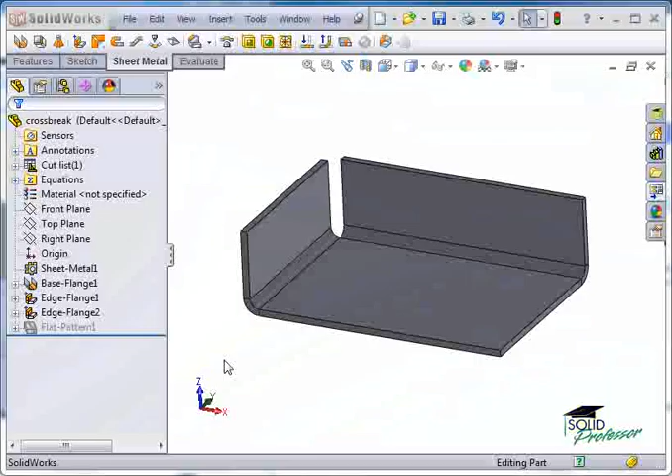If you've ever found yourself manually sketching lines to represent a cross break on a sheet metal part, SOLIDWORKS has a tool that will take care of that for you. Here, I have a simple sheet metal part, and I want to add a cross break to the bottom face to give it some more rigidity.

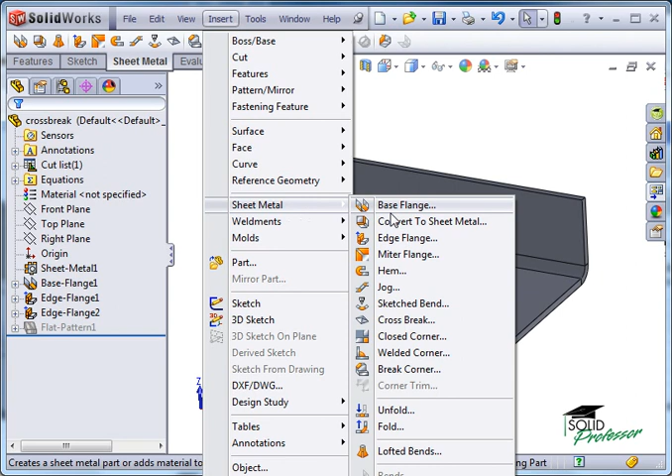I can activate the cross break tool from the sheet metal toolbar, or from the Insert Sheet Metal drop-down menu. The selection box asks me to select the face or faces I would like to add to the cross break. I'll select the bottom face.

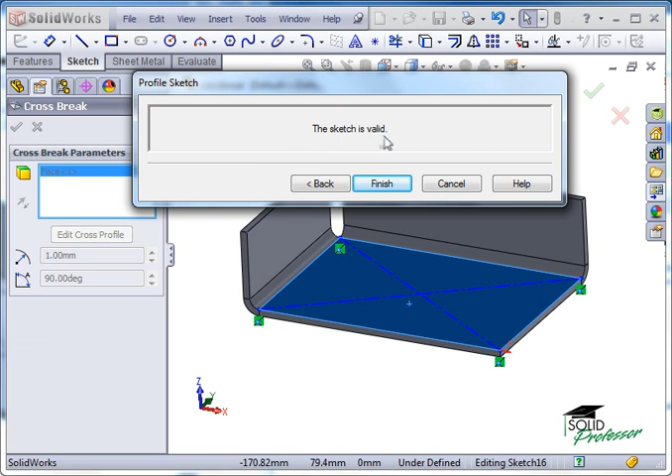I can use the reverse direction button or click the arrow in the graphics area to change the direction of the cross break. You can also use the Edit Cross Profile button to edit the position of the sketch lines. When I click it, a window appears saying that the sketch is valid. Notice the sketch lines have coincident relations at each corner.

If I delete one of the relations and move the sketch inward a little bit, the message window tells me that one of the endpoints of the sketch is not on one of the face's edges. As soon as I create a coincident relation between the endpoint and the edge, the message window tells me that the sketch is now valid.

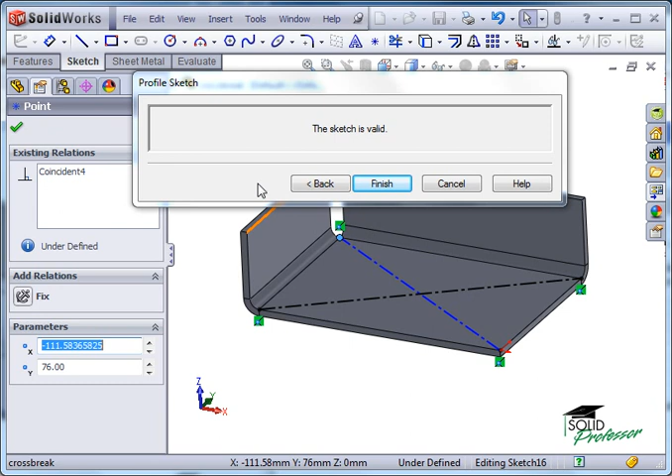I can make more changes to the sketch as long as each endpoint is on an edge. Once I'm finished making changes, I'll click back to return to the Property Manager. The next two options let me define the break radius and the break angle of the cross break.

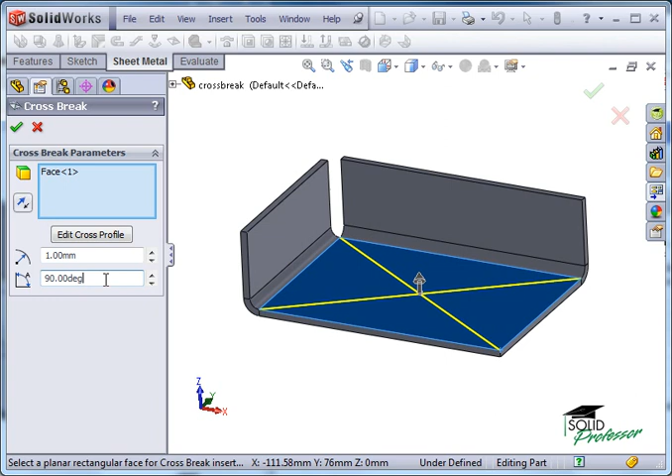Now keep in mind that the cross break feature does not actually change or deform the model in 3D. The idea behind this feature is that it'll automatically create the sketch lines, reference dimensions, and annotations that appear in the drawing to represent a cross break. When I click OK, the cross break is created.

Notice that nothing is changed other than the appearance of the cross break lines. This is simply a representation of the cross break. I can still add edge flanges to the other edges of the part, and I can flatten and fold the part without any problems. At this point, I'll create a drawing to show you how the cross break is represented in a 2D drawing.

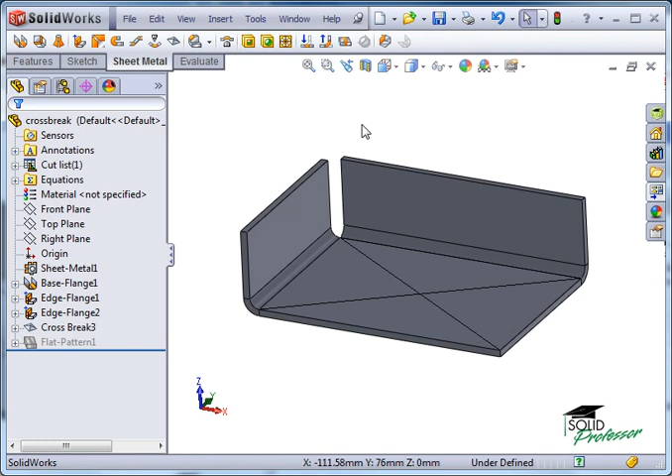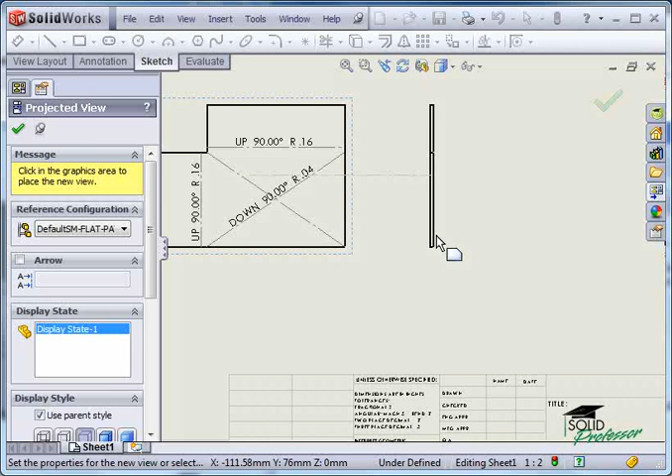When I insert the flattened view of the part, you can see the annotation that is given to the cross break. It shows the direction of the cross break, the bend angle, and the bend radius that I specified in the Property Manager.